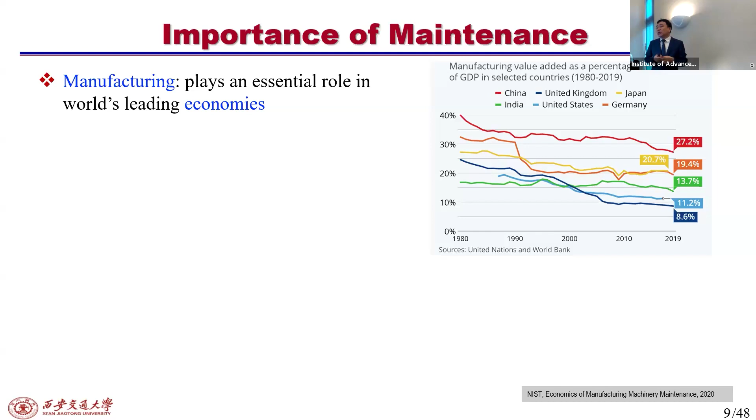As we know, I'm in mechanical engineering, and nowadays manufacturing plays an important role in the world's leading economies. There are some losses due to maintenance issues, and these losses are proportional to the size of the manufacturing industry. They can create a negative impact on the world economy, worker safety, and well-being.

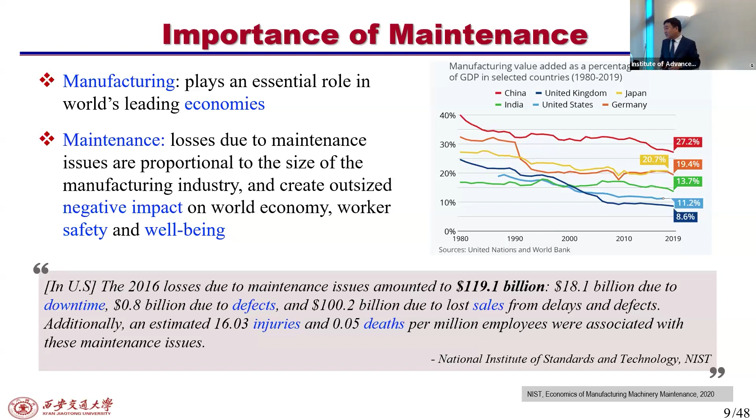When we talk about intelligent fault diagnosis, it actually belongs to the whole spectrum of intelligent maintenance. So what is intelligent maintenance? From the definition, an intelligent maintenance system is a system that utilizes collected data from machinery in order to predict and prevent potential failures.

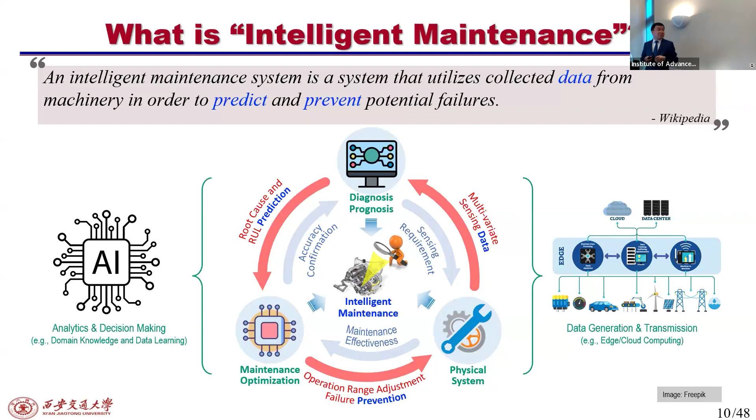So actually, intelligent maintenance involves lots of things. For example, you have basic systems where you need to get data, involving maybe sensing techniques. Then when you get data, you need to analyze it, do diagnosis and prognosis. Based on these results, you need to do root cause analysis, and also remaining useful life prediction. Based on these prediction results, you may need to do maintenance optimization. So intelligent maintenance involves all of these research activities.

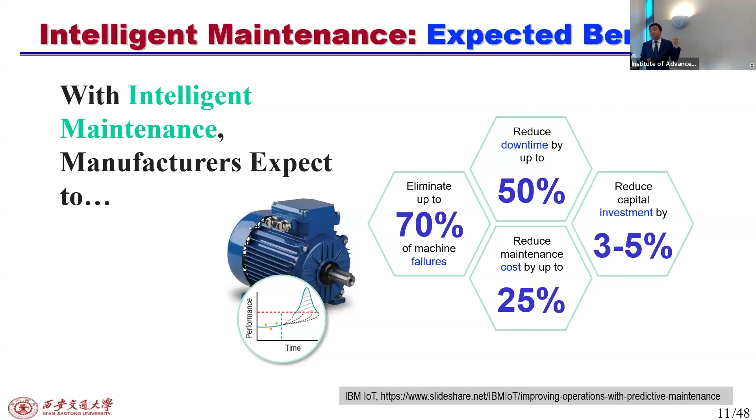With this kind of intelligent maintenance, manufacturers expect to reduce downtime, eliminate machine failures, reduce capital investment, or reduce maintenance cost by a certain percentage. This is the kind of benefits that intelligent maintenance can bring.

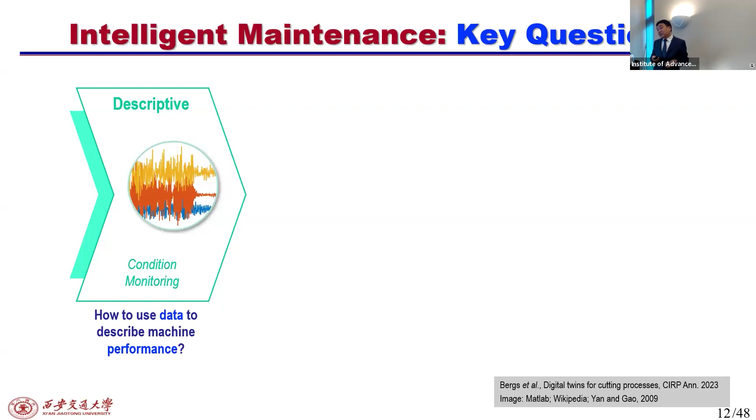There are some key questions Professor Jackson talked about yesterday, which consist of 4 different parts. The first one is condition monitoring. What we want to do is use the data to describe machine performance, so we need to do condition monitoring. Then we need to do diagnosis.

We want to know what is the root cause for machine failures, and also how machine performance deteriorates with time. So we need to do remaining useful life prediction. After we get the predicted results, we want to know the optimal operation condition that can maximize service life - that is operation optimization. So all of these 4 issues are related to intelligent maintenance.

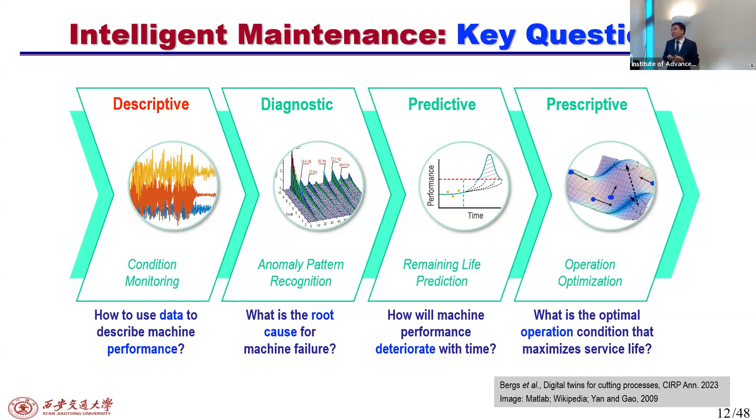Back to 2016, this CIRP Annals review paper pointed out that currently there is an integration need for high-end equipment for manufacture and service. When we talk about manufacturing, it's about designing a product and making it. Then service means after the product is produced, it needs to be put into use, and then it's in its so-called operation and maintenance stage.

This kind of integration can bring benefits. For example, intelligent maintenance can help upgrade and improve the design and manufacture of high-end equipment - things like jet engines, nuclear power plants, helicopters, high-speed trains, and wind turbines. These equipments are designed to be used for a long time, maybe 30 or 50 years, unlike our desktops or smartphones, where every year a new generation is released and people just get a new one, while the older ones are still in very good condition.

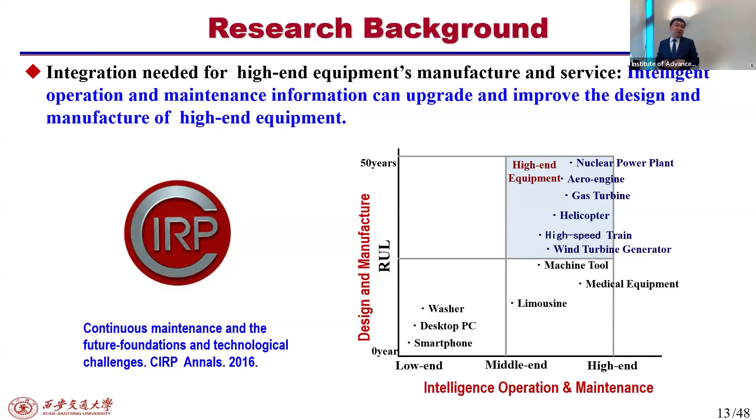For this kind of high-end equipment, once it's being used, it will last maybe 30 or 50 years, so most of the time it's actually in service. So we need to do condition monitoring and diagnosis for this type of thing.

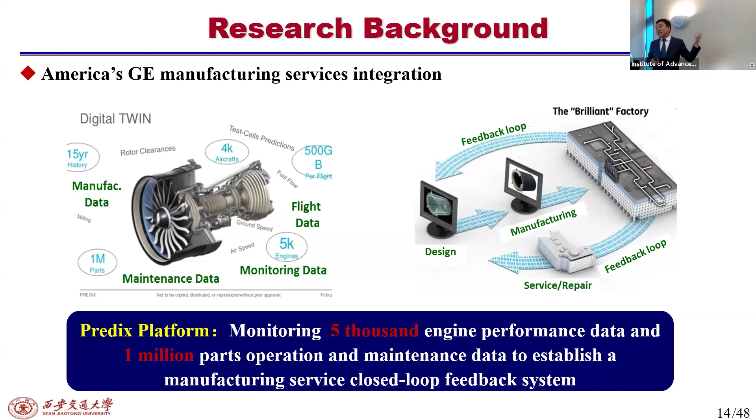Here are two examples. In the United States, GE utilizes their Predix platform to monitor 5,000 engines' performance data and 1 million parts operation and maintenance data, to establish a so-called manufacturing-service closed loop feedback system. Within this closed loop system, they can help make or design their next generation engines.

Also, in the UK, Rolls-Royce has this kind of gas turbine manufacturing-service integration. They built an intelligent ship system, which has functionality like diagnosis, operation and cluster optimization, and this type of thing, to realize gas turbine manufacturing-service closed loop. Then they can upgrade their new generation of gas turbines.

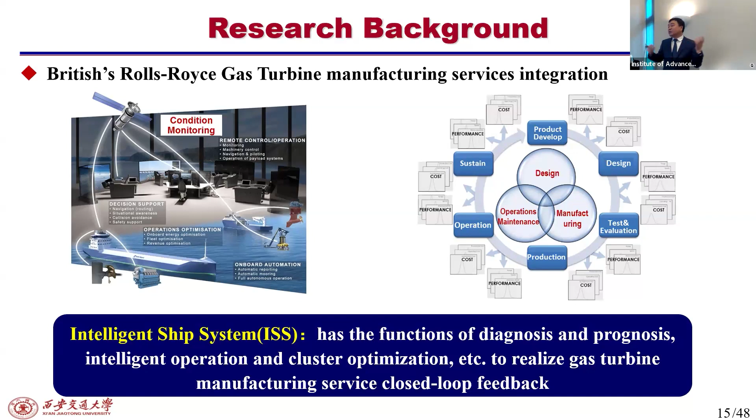From the life cycle point of view, we consider this high-end equipment to consist of three parts: design and manufacture, service and monitoring, and operation and maintenance. With each stage, there will generate lots of data. For example, for the design method, you need to design, so you have lots of design data. Also, when you produce your product, you have lots of quality data.

What I was thinking is, if we can utilize that design data and quality data to help us better do monitoring and operation and maintenance. Because normally people never use this kind of design and manufacture data to help with the monitoring task. Also, from service, monitoring, and operation and maintenance data, there are many monitoring data, performance data, and some failure statistic data. So we are thinking if we can utilize this kind of data to help improve our design.

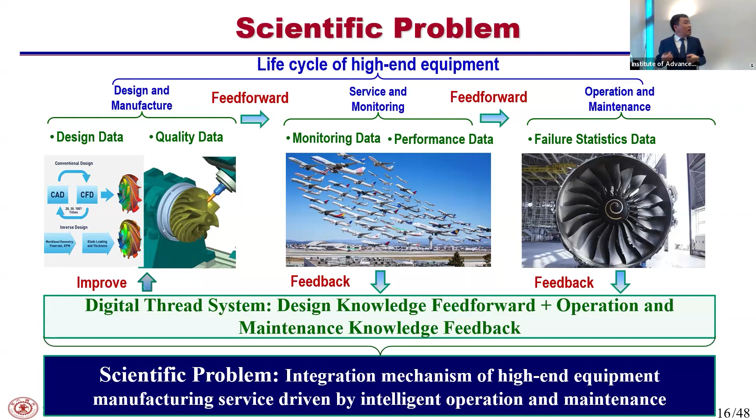So we want to actually integrate all of this life cycle data. We build this kind of digital thread system. We use design knowledge to provide feed-forward knowledge to help condition monitoring and diagnosis. And also we utilize operation and maintenance knowledge we extract from monitoring data, to provide feedback to help improve their designs. So how can we do this kind of integration - what we're trying to do is, based on this intelligent operation and maintenance knowledge we extract, help to do design improvement.

So over the past years, we have built up this kind of technical roadmap, also from this life cycle point of view.

So including the three stages in this design and manufacture stage, based on users' requirements, you can build digital models to do some design, and then manufacture and produce your equipment.

After this equipment is being used, it will generate lots of monitoring data. So you can use, for example, big data mining, and do some kind of knowledge discovery work. With this knowledge discovery, you can do diagnosis and prognosis.

Based on diagnosis and prognosis results, you can do many things for operations maintenance. For example, you can help with spare part management, inventory management, and spare part planning.

The most important thing is you can identify some fault source. When you identify this fault source, you know which part of your equipment is easy to be damaged. Then maybe that's because when you started design, you didn't think about that part—for example, maybe some part has high stress, something like that.

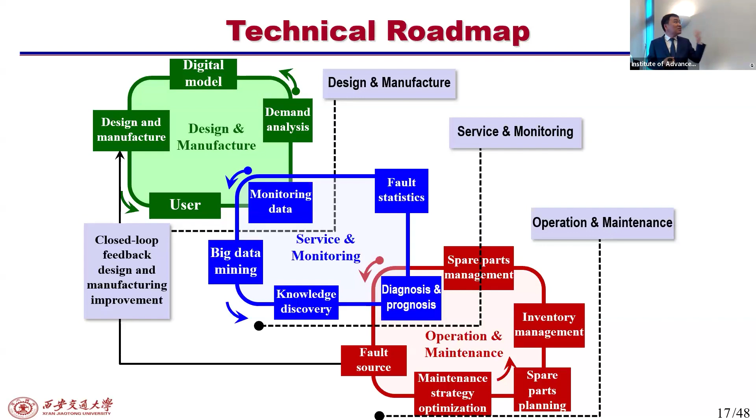So diagnosis and prognosis plays an important role within this life cycle management of high-end equipment. Actually, it belongs to predictive maintenance.

Predictive maintenance is rated by CB Insights as one of the trends of artificial intelligence in 2019. Nowadays, people are using artificial intelligence to do this diagnosis and prognosis work.

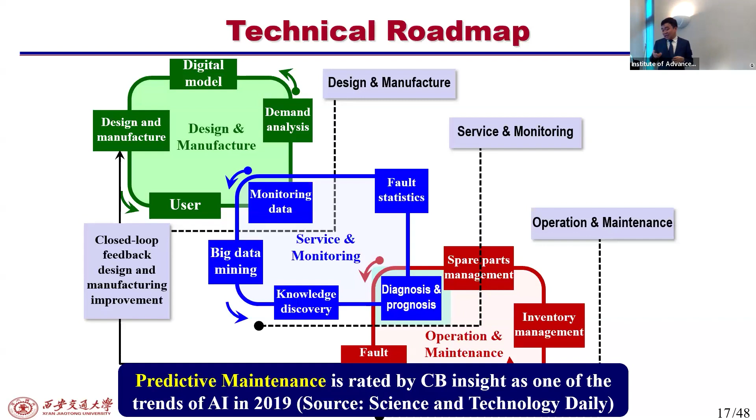Here's an example of how traditional fault diagnosis is implemented. You have sensors, you get data, you do some signal processing, for example spectral analysis or statistics, and you get, for example, a state index. Based on this state index and the threshold you set, you can evaluate if the system you're monitoring has some problem.

Nowadays, for this modern intelligent method, sensors become smart. Sensors can not only get a sensor reading itself, they can also do some signal processing tasks. Also, we can use some AI type of things to do data acquisition.

For this data analysis, you can use some learning algorithms. That's why nowadays deep learning transformer methods are becoming more and more popular in the diagnosis area. Based on your learning algorithm outputs, you can do some evaluation to check if your monitoring machine has some problem or not.

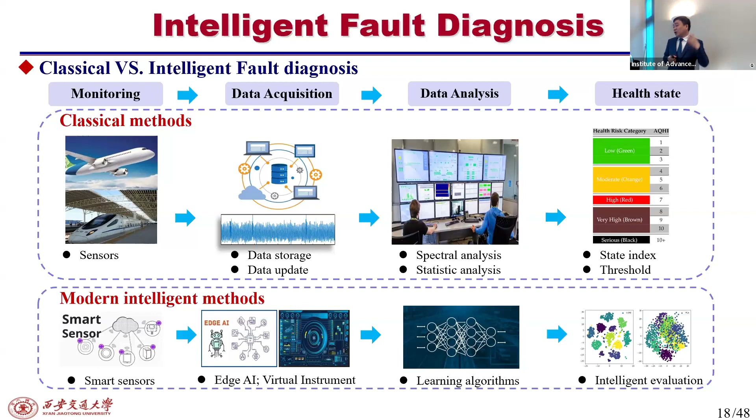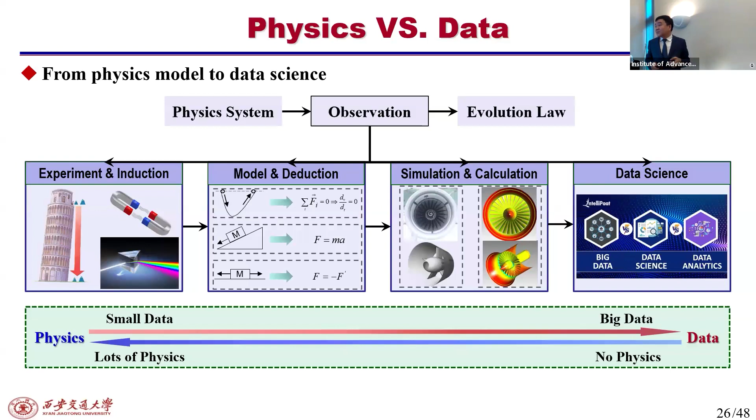We know the purpose of modeling is to mine the evolution law from data or from a phenomenon, right? There are two different approaches. One is the inverse paradigm that's based on data science. The other is a forward paradigm based on physics models.

So for each of these approaches, there are pros and cons. For example, for this inverse data science-based method, it relies on association rules to mine some kind of laws from the data. It has adaptivity to high-dimensional data, but it's a kind of black box model. It has weak interpretability.

But for these physics-based models, it relies on causality based on, for example, physical laws, and you can build your physical models. It's not a black box, it's a white box model. It has strong interpretability, but as you know, because nowadays the equipment becomes more and more complex, it's hard to build accurate physical models.

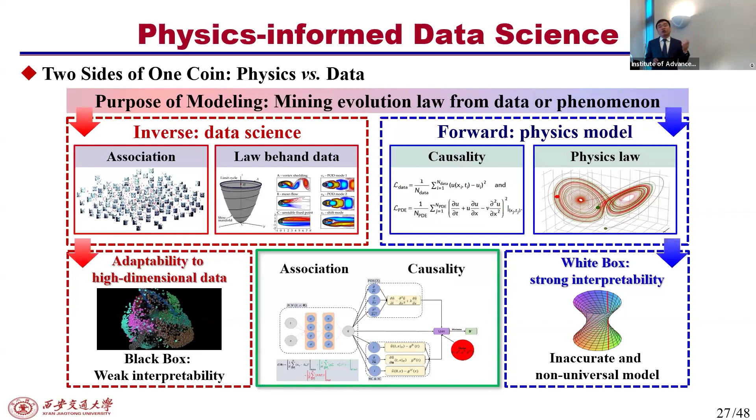So what we are trying to do is utilize both advantages of data science and physical models, try to integrate them, and present a so-called physics-informed data science approach to help us do a better job for diagnosis work.

So basically, there are three strategies to implement this physics-informed data science: from a data prior, an inductive prior, and a learning prior. So from the data prior, as I said before, if you have a complete data set, then deep learning can give you very accurate performance, right?

So for this inductive prior, you can actually induce some general laws from observations of multiple individuals, right? For example, you can try to find some symmetry properties of your observation systems, these kinds of things.

And also for this learning prior, it can deduce specific models for individuals, starting from first principles. So in our engineering domain, if we want to implement these three strategies, here's how we do it.

For the data prior, we can build up data augmentation techniques. That's why nowadays everyone uses digital twins. If you can build a digital model of your actual physical system, you can utilize it to help generate data, which will help you train your deep learning models.

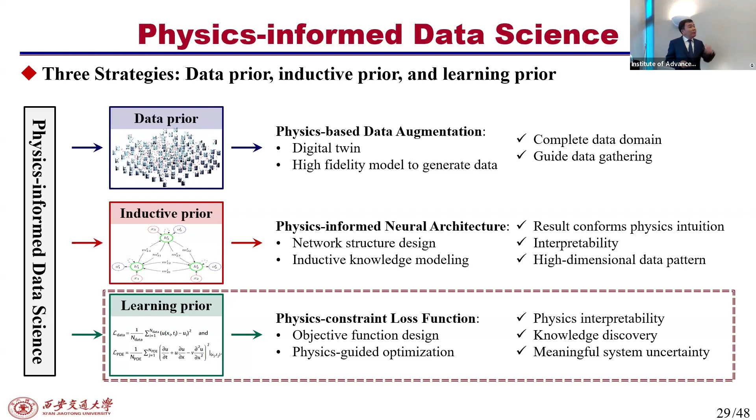Here I will show a case study of how we use these physics-constraint loss functions, embedding this function into our models for a diagnosis task. The case study is about building a physics-constraint variational neural network for the state assessment of a gear pump.

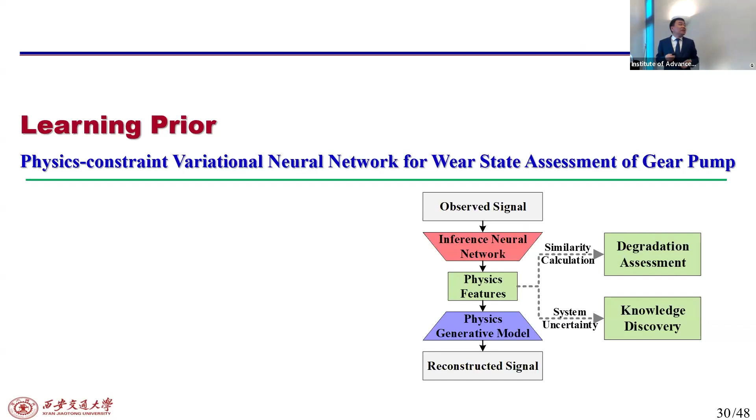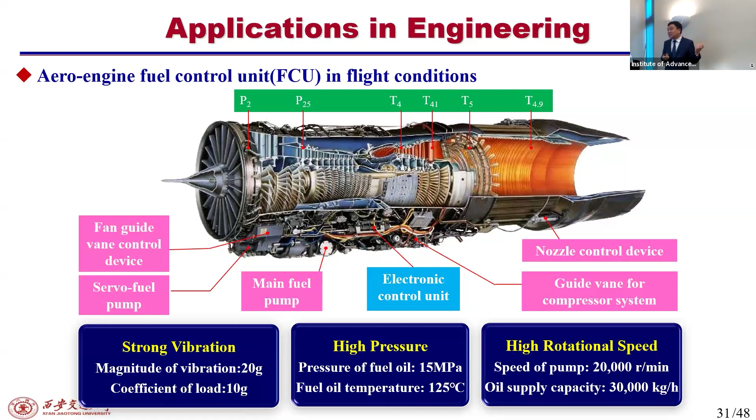Since my host is the aeronautics department, I'll show you an example. We know aero-engines are very important for airplanes. The aero-engine fuel control unit, when working, is under very strong vibration, high pressure, and high rotational speed. This fuel control system is key to the safety of aero-engine operations.

Based on a study by the American Institute of Aeronautics and Astronautics, they gathered statistics showing 387 fuel system failures. Among these, 66 were directly caused by fuel pump failures, and 54 were hydraulic line failures mainly caused by fuel pump failures as well — meaning the failure rate of fuel pumps in fuel system failures is as high as around 31%.

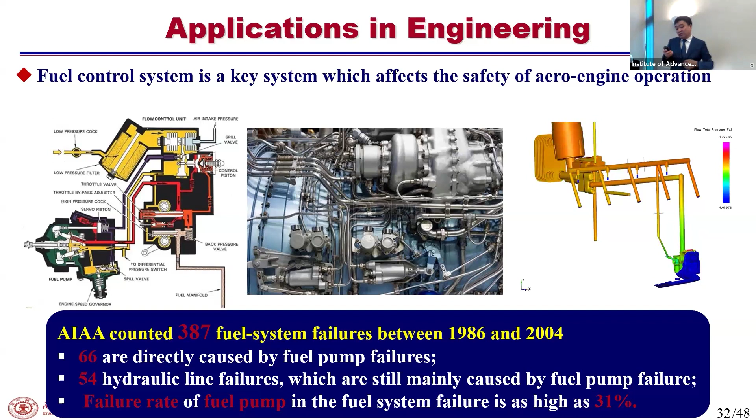That's why I want to show this case study. We are focused on fuel pumps — there are two major types, the gear pump and the vane pump. In today's case study, I will show how we do the wear assessment for a gear pump.

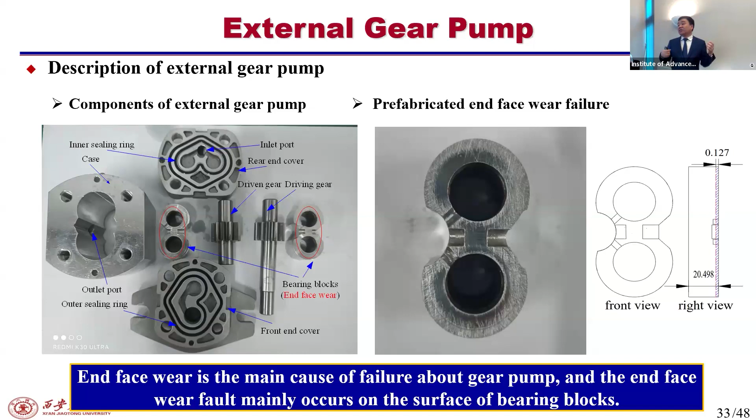So we need to build up the physics models of this gear pump. Based on our study, end face wear is the main cause of failure in this gear pump, and this wear fault mainly occurs on the surface of the blocks. If we want to monitor or diagnose this failure, we need to know what kind of signals can indicate the failure of the gear pump.

So we are trying to find a mapping relationship between the end face wear and the output signals. We know that when end face wear happens in this gear pump, it causes variation of the lateral clearance, which causes a change in the boundary condition of the flow field, and as a result causes variation in the outlet pressure pulsation. This means if we want to monitor the gear pump, we can measure these pressure pulsations.

So we can analyze the pressure pulsation signals to diagnose if that gear pump has some problem. It has a direct relationship.

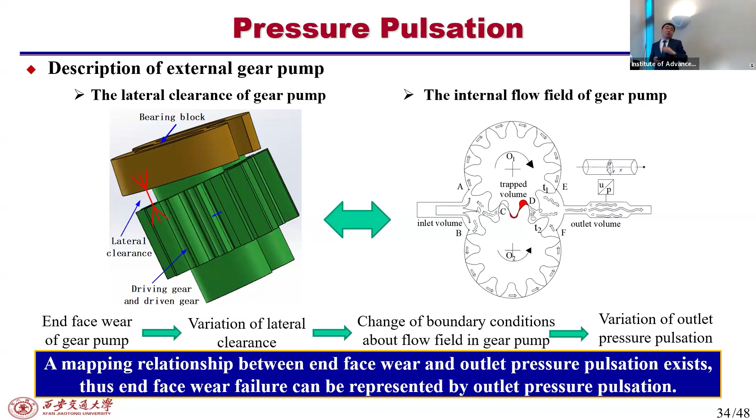So then how do we introduce the learning prior in the neural network? We start from first principles — we build formulas to understand the physics world, here the physics world being the gear pump, then embed it into a data-driven learning process.

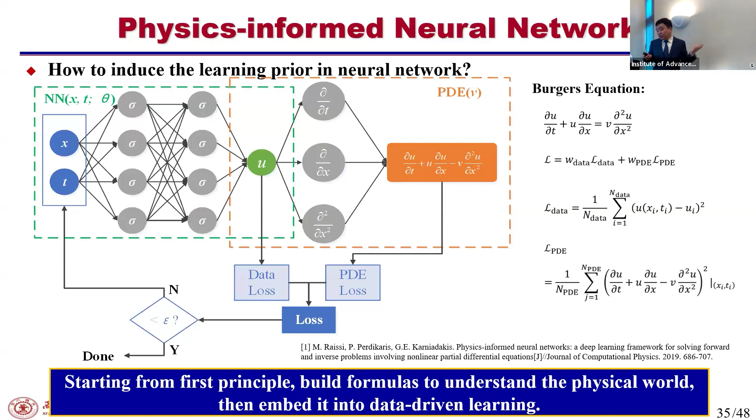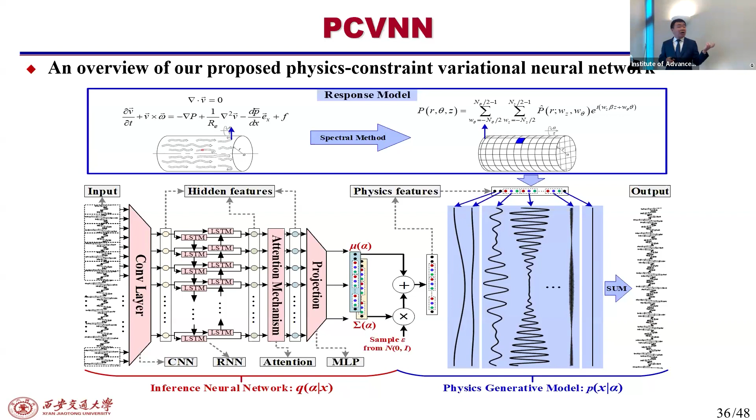I will show some details of how we implement this. We first build up our physics models, utilizing fluid analysis to derive them — specifically the governing equations and Navier-Stokes equations, which are normally hard to solve mathematically. So we use a special method with spatial discretization.

Then we get these pressure pulsation models as shown in the lower right. It contains amplitude modulation and frequency modulation, with some spectrum coefficient and wave number. It's actually a mix of multi-scale vortex.

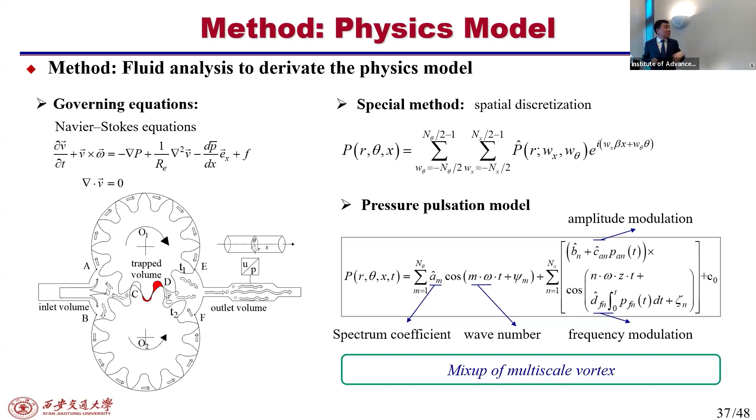Then we can build some physics laws here. Actually, all of the parameters are derived from this pressure pulsation model. So we build up this kind of upright network structure.

The observation signals go to this inference network, and we can extract some physics features. We utilize these physics generative models based on our response model to reconstruct the signal. If we can perfectly reconstruct the signal, it means the physics features we extract characterize the gear pump status.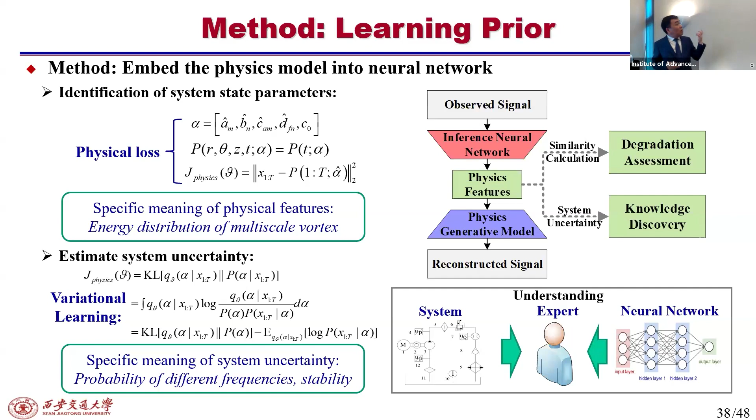So then, based on those physics features extracted from these deep learning models, we can do, for example, degradation assessment, or even evaluate if the system has some uncertainty. So that is the approach for how we embedded these physics models into this neural network.

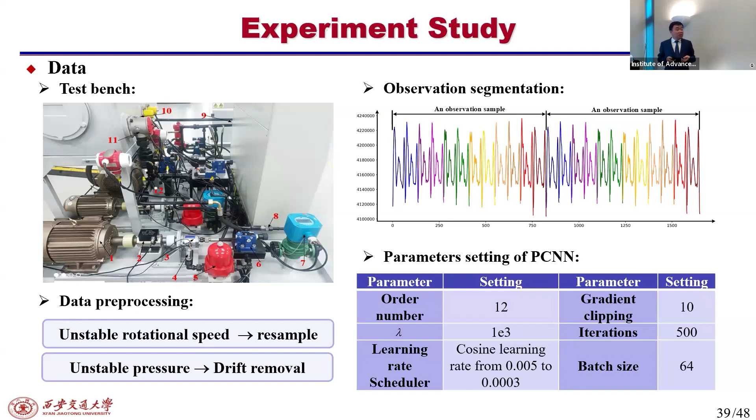So then we do an experimental study. We set up this test bench and do some data pre-processing. We try to remove some unstable rotation speed influence and unstable pressure influence. So we set up some parameter settings for our so-called physics-constrained neural network structure.

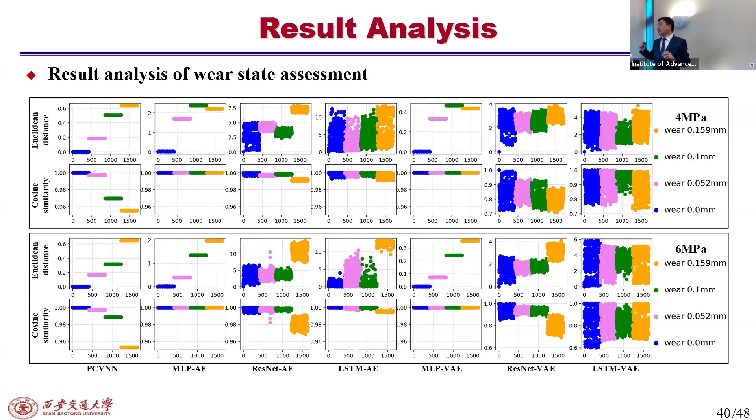So it has an increasing trend for some metrics, for example the distance metrics or similarity metrics. But for other approaches, traditional approaches, some maybe have some trend, but for others you cannot find this trend with the increase of wear.

So we can also take a look at the reconstructed signals using different approaches. As you can see here, the upper right is our approach's reconstructed signals, and the lower right is the traditional autoencoder's. So you can see with our proposed approach, you can use a few...

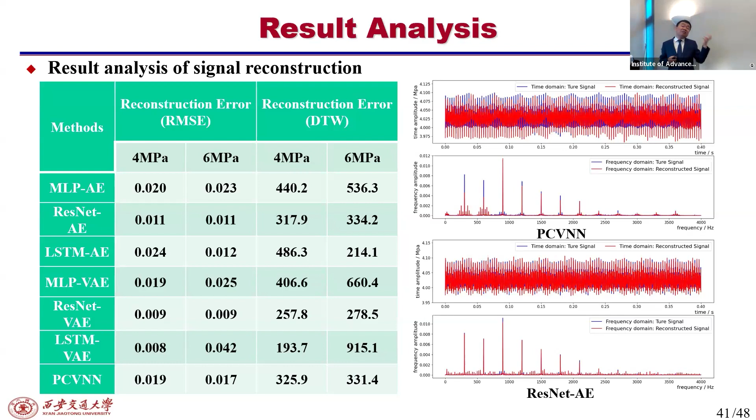...similar coefficients to reconstruct, if we take a look from the frequency point of view. But if you use the traditional method, you need more frequency components to reconstruct the original signals. That's one of the advantages because we embed our basic knowledge into our network structures.

So we can also take a look at some system uncertainty. Actually, only some of the physics features we extract are dominant for the system, but others are just very small numbers, which means those features don't affect the system significantly. From the TSNE visualization point of view, because of this physics constraint, the trajectory is very controlled, because we added the physics constraints on these models. For others, it's just random.

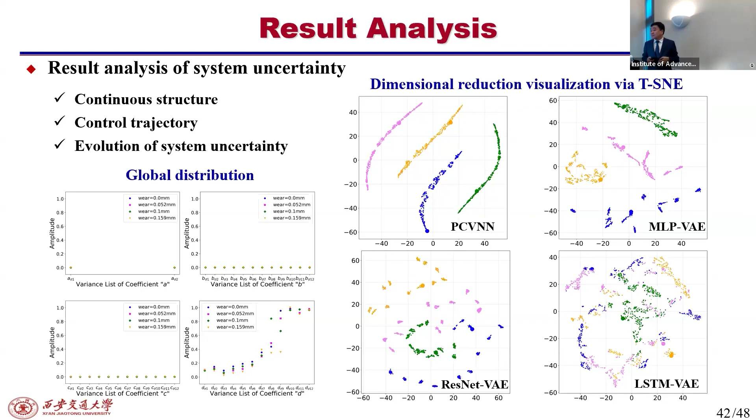So we can also interpret the extracted physics features from this energy distribution point of view. The left side figure is our extracted physics features. The right side is just the traditional Fourier transform of this pressure signal. As you can see, it has a consistent structure of energy distribution with our Fourier transform results. It actually reaches maximum at the triple meshing frequency of your gear pump, and then goes down.

So this extracted physics model, physical features from these deep learning models, well matches the signal itself and its energy distributions.

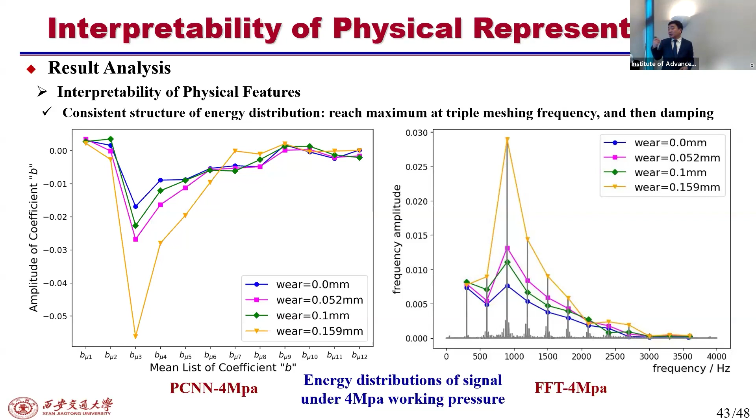So in summary, in today's talk, I introduced a physics-constrained data-driven model for this wear state assessment. I gave explainable feature learning methods based on physics-constrained variational neural network, where these learned features can actually represent the energy distribution. They have explicit physics meanings, so we can even estimate the system's uncertainty.

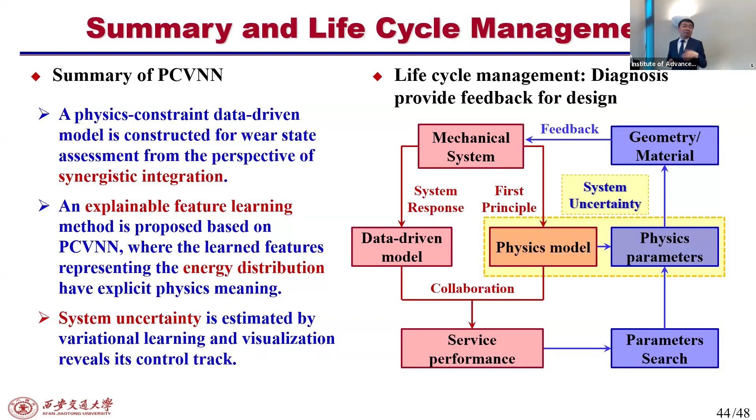So actually, because the clearance changes, it will affect your system's uncertainty. Then maybe during your design stage, you can set up a proper clearance value to make your system more stable. We can get this kind of logic from the diagnosis results to help you set up some proper clearance values.

So in conclusion, I talked about AI-enabled intelligent diagnosis approaches. One case study shows the power of this AI-enabled diagnostic method. It also provides a collaborative perspective for data science and physics models for diagnostics by leveraging physics-informed deep learning. So for future directions, we think about how to balance physics and data.

It's very difficult, because when you train your models and add some constraints, training becomes difficult. So how can we balance this? Also, can we model the physics knowledge for more efficient collaboration between physics and data science? Also, can we automate some feedback of design for online optimization? And most importantly, can we break through some physics problems for new knowledge discovery?

That's why this whole idea of AI for science is very popular. You can use AI to maybe find some physical equations. That's what the science people are doing now.